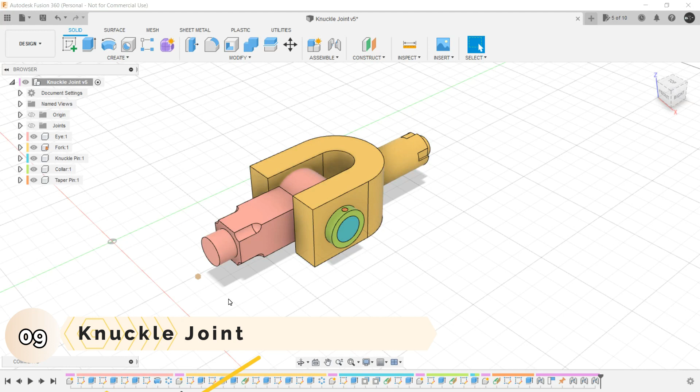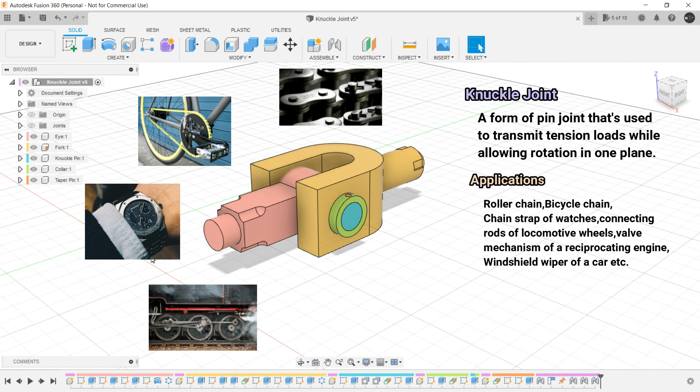So the next assembly that we are going to create is of a knuckle joint. A knuckle joint is a form of pin joint that's used to transmit tension loads while allowing rotation in one plane. There are many applications of this particular joint like link of roller chain, bicycle chain, chain straps of watches, connecting rods between locomotive wheels, valve mechanism of a reciprocating engine, windshield wipers of a car, and the list goes on and on.

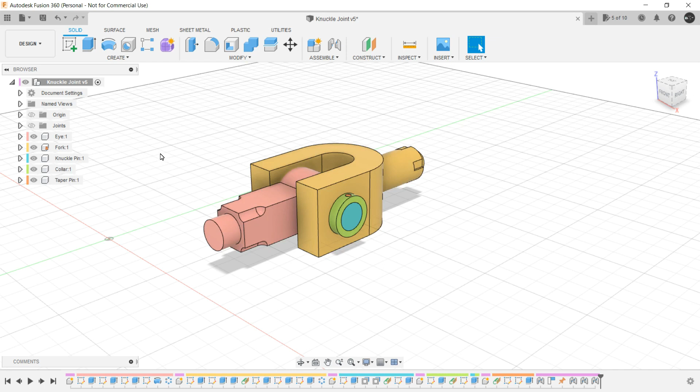In this assembly, we are having four major components: the eye end, fork end, knuckle pin, and collar, and one minor component, that is taper pin. So here also we will follow the same procedure of concentrating on one component at a time. So first we are going to make this eye component. So let's hide all the other ones.

Now in this eye component, we are having one particular profile perpendicular to another. So let's create this one by creating a new design. Go to assemble toolbar and create a new component. Let's name it eye end.

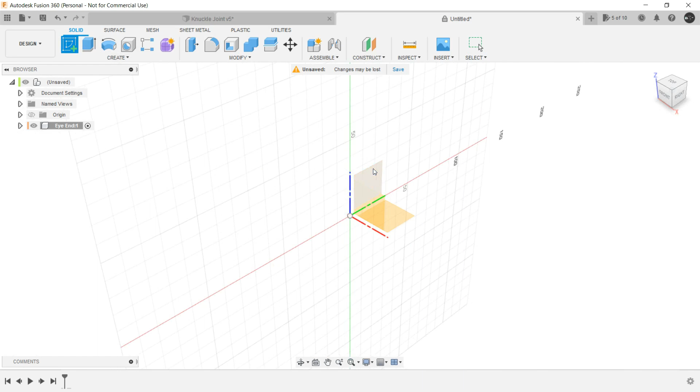Now create a sketch in any of the vertical planes. And let's create a circle by invoking the circle command. The shortcut for the same is C in the keyboard. Let it be of any dimension. And let's press pull it outwards.

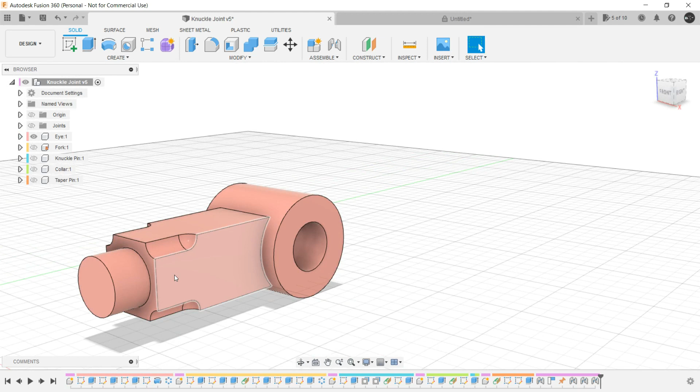Now here, as you can see, this particular profile is like perpendicular to this particular profile, and it is joined by a rectangular extrusion. So what we will do, we will create a sketch, a fresh sketch in this particular plane which is perpendicular to this particular sketch, or basically this particular profile.

Let's create a concentric circle. Let's trace the origin and let's place it somewhere here.

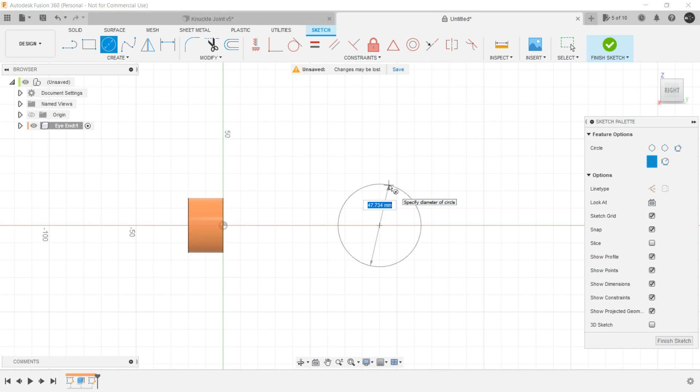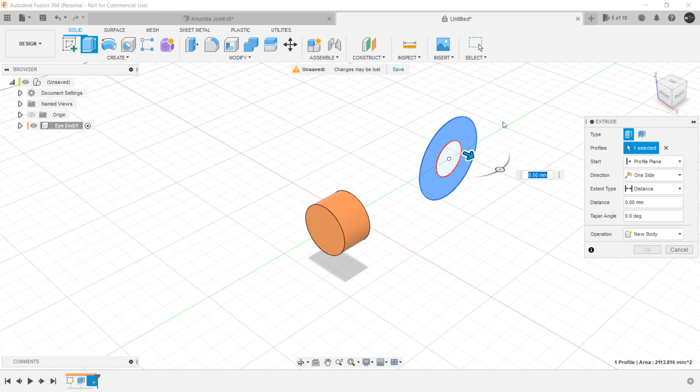Now for the inner circle, you have to remember the dimension. Let it be like 25 mm, and finish the sketch. Now select the profile that is generated. Press pull, direction should be symmetric, and let's extrude it outwards. I think this much is sufficient, and click on OK.

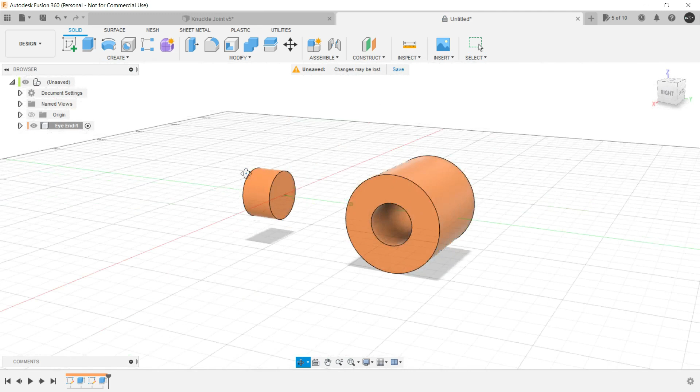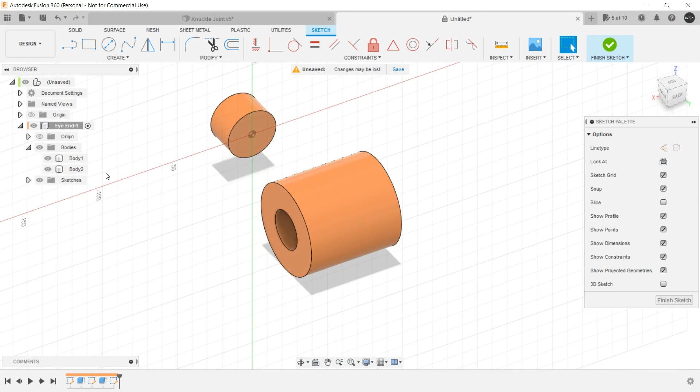Now we are having this rectangular extrusion from this particular profile to this particular profile. So what we will do, we will select this and create a sketch over this one. But as you can see, this second body is hindering our sketch. So what we will do, we'll go to the eye end component and we will hide the second body. This is the first body, this is the second body. So we are going to hide this one.

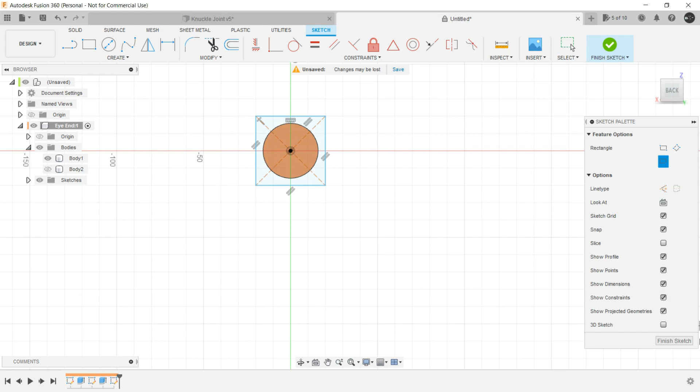Now we can create a sketch over this. So let's create a rectangle, a center rectangle to be precise. Let's create a square like structure. Finish the sketch and show second body as well. Now select this region, right click, press pull, make the extend type as to object and select this surface and click on OK.

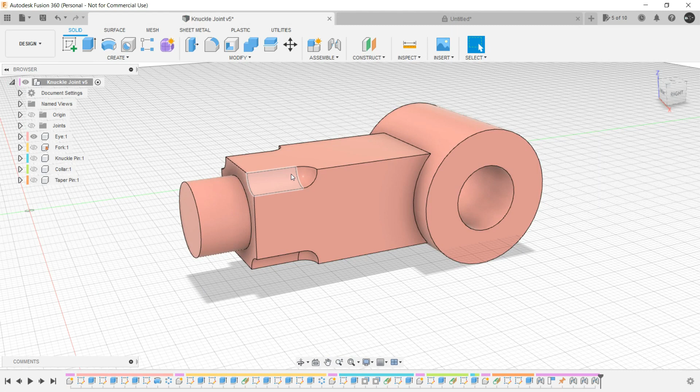Now the outline of eye end is completed. Just one detail is required, that is this particular section of the model. So for this, we will select this particular face, invoke the line command by pressing L in the keyboard, select this end, select any point over here.

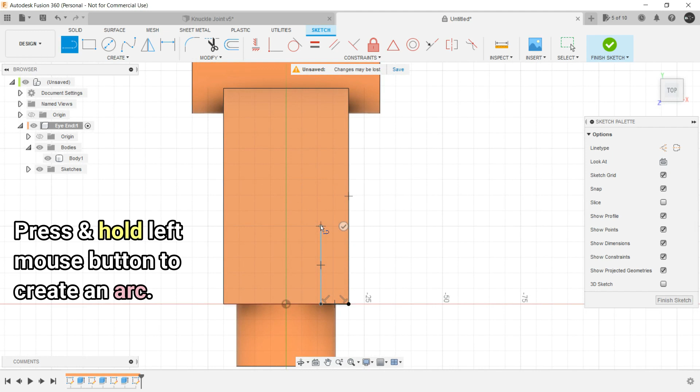Select any point, a vertical one, and then press and hold left mouse button so that we can create an arc, and just close the region.

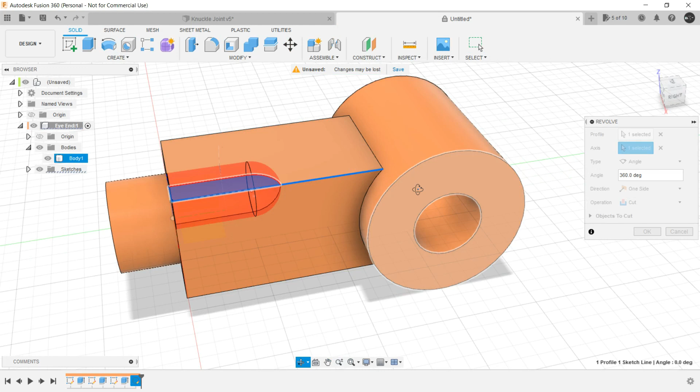Now finish the sketch, select this region and invoke the revolve command. For the axis, select this, and click on OK.

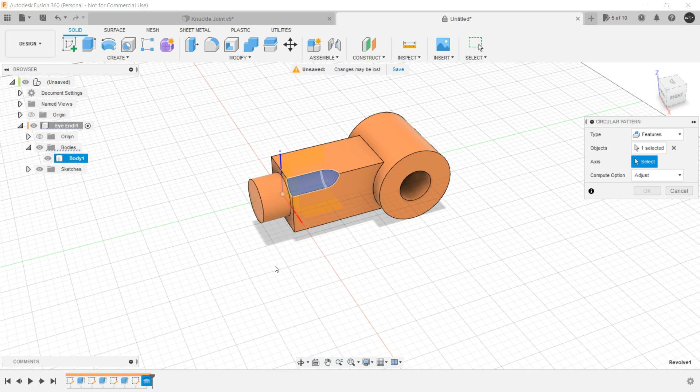So this particular profile has been generated, but this is required in all the 4 corners of the rectangular extrusion. So what we will do, we will create a circular pattern and then select the feature. Here we are having types as faces, bodies, features and components. So here we will be selecting feature because this is a feature that we have generated here. And then for the axis, we have to select the green axis over here, which is not visible as of now. So what we will do, we will zoom out and it will be visible.

It's good to go. Click on OK. So our first component, the eye end, has been created.

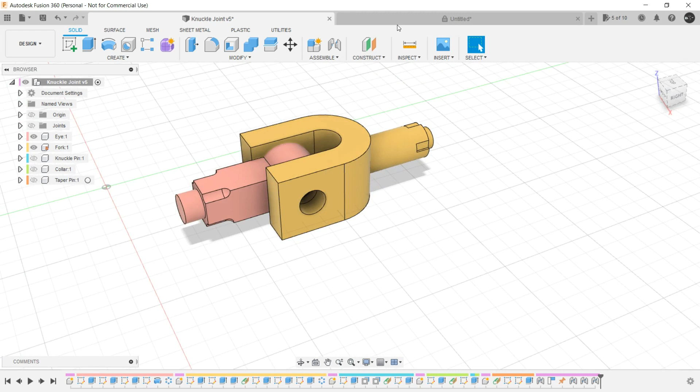Now let's move on to the second component, the fork end. This fork end is dependent on the eye end itself, so we will be using this as the reference. But to create any component, you have to activate the head assembly and then go to the Assemble toolbar and New Component.

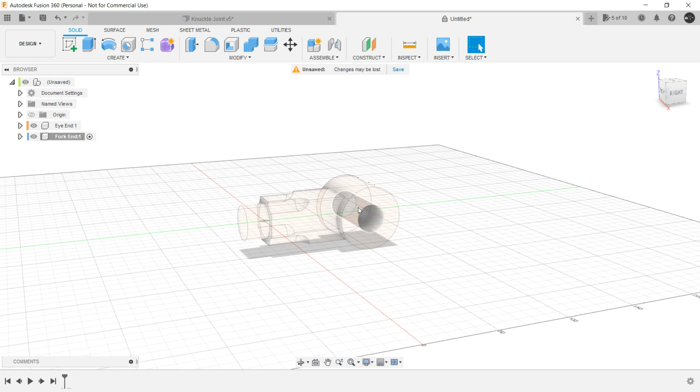This time write as fork end and click on OK. Now select this particular surface and create a center rectangle. Let it be of any dimension, but make sure it is larger than the outer circle diameter.

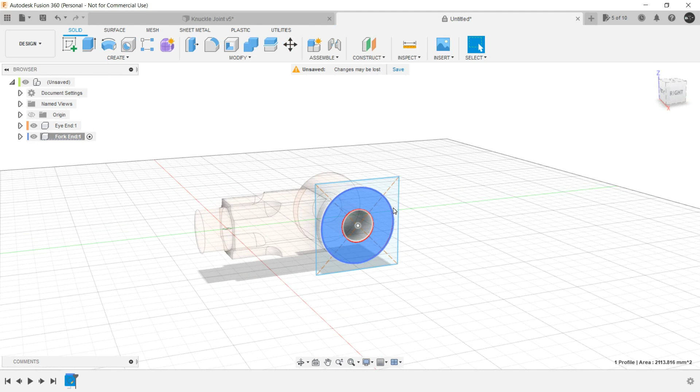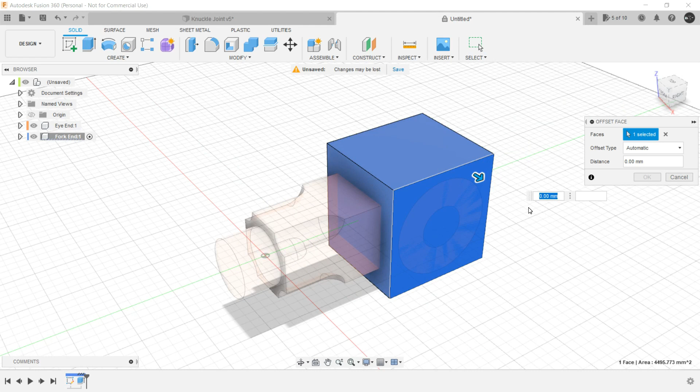Let's finish the sketch. Select this profile, and let's select this one also. Right click, press Pull. Make the extend type as 'to object' and select this surface. Click on OK, then select this and extend it by 10 mm here, and let's extend this one also by 10 mm.

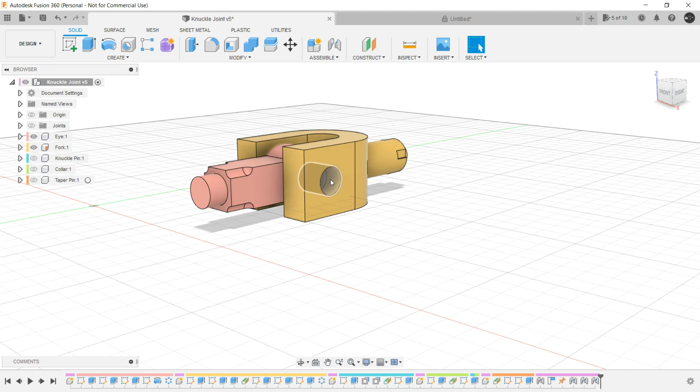Now what we require is this fork looking structure. We have created up to this much only, except for the hole that we will be creating next.

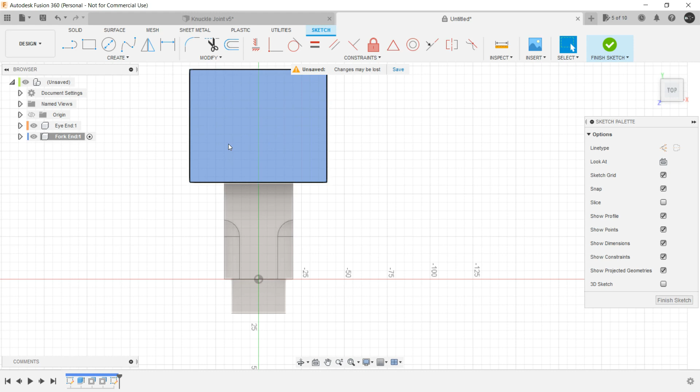So for this, we will simply select this particular face and start creating a sketch. Now we don't know where this eye component is inside this particular extrusion, so we will go to Project and select this particular body completely. Click on OK, and the body has been projected to the sketch itself. So now we have a clear idea from where to make the cut.

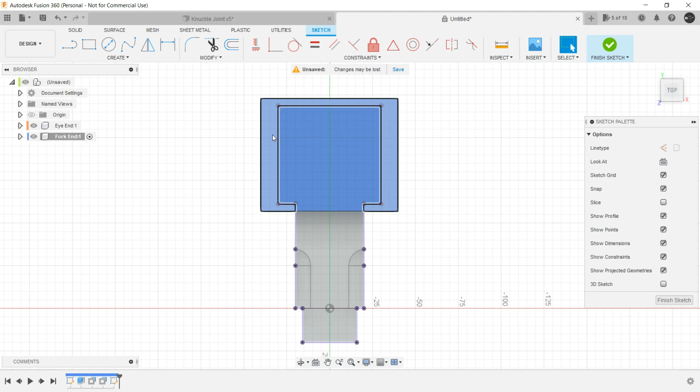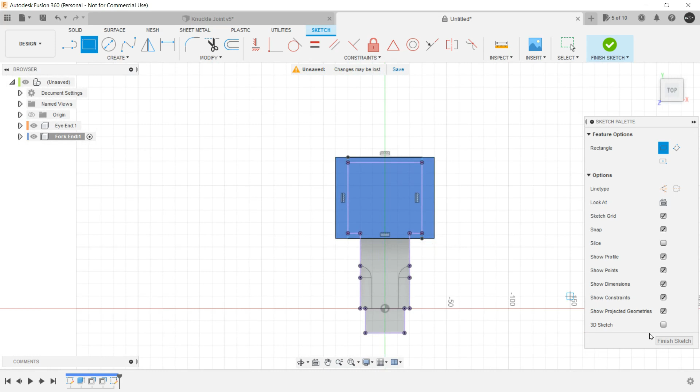Now invoke the rectangle command again, this time 2-point rectangle, and select this point by tracing from the projected sketch. Finish the sketch. Select all these profiles by pressing Ctrl, right click, press Pull, all the way down. But as you can see, this is also cutting our previous eye end component, which is not desirable.

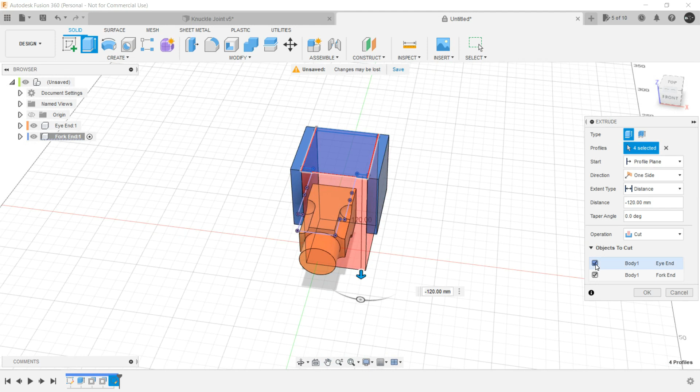So what we will do is, in this extrude palette, we have 'objects to cut'. Here, deselect the eye end and click on OK.

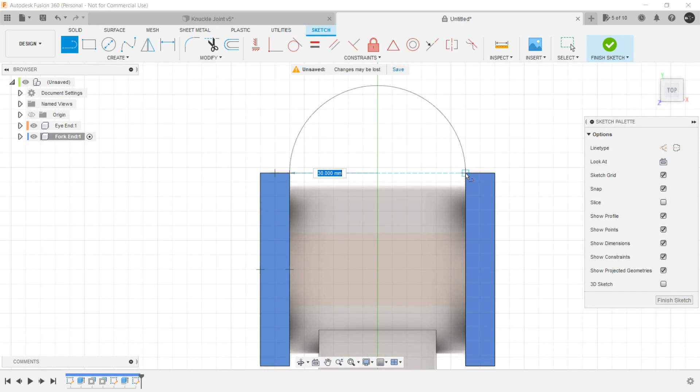Now again select this face, invoke the line command, select this particular end, hold the left mouse button and select the other end. Similarly, from here, hold the left mouse button and select this end. Notice the region is not closed, so we have to close the region as well. Then finish the sketch.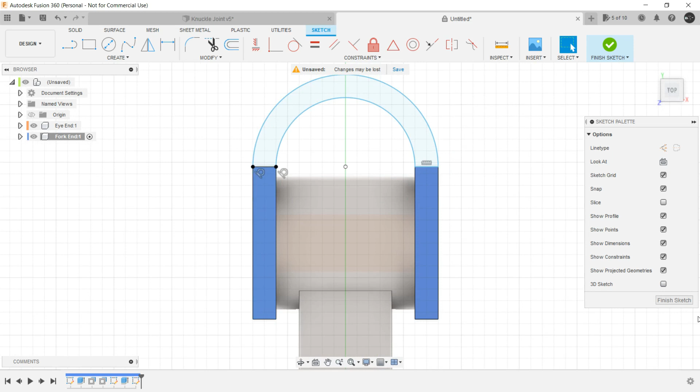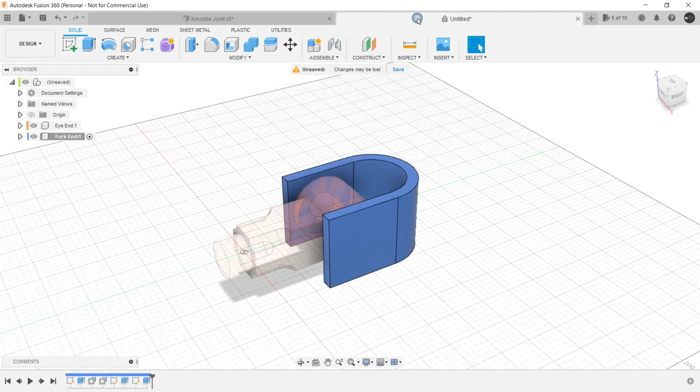Now select this profile, press Pull. Again extent type to object and select this particular face. So the fork end is almost created, except for a hole over here and this particular profile. Now we will create a hole in this particular face.

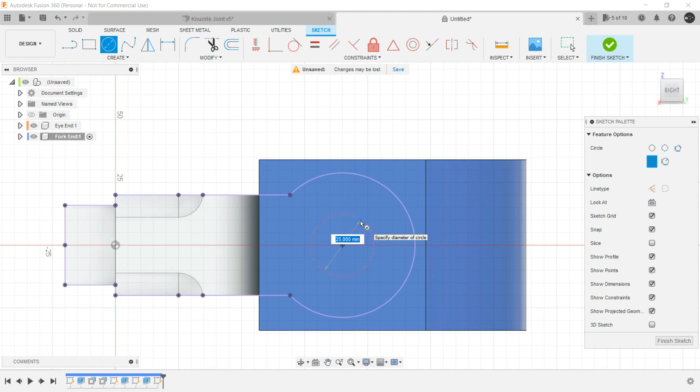Again project this body, click on OK. Invoke the circle command and create a circle of 25 mm. Select this, press Pull, and let's create a hole.

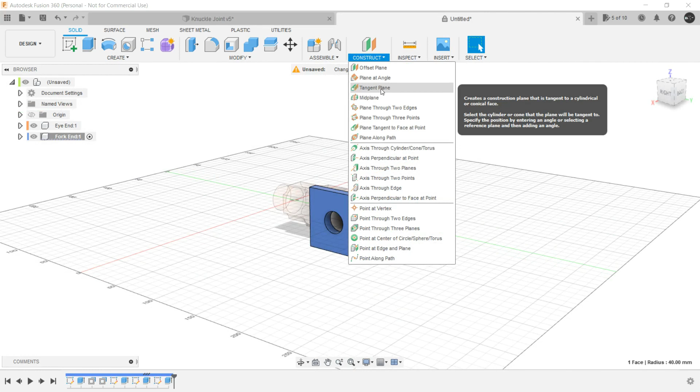Now for this particular profile, we need to create a plane over here. Let's create a tangent plane and start sketching on this one.

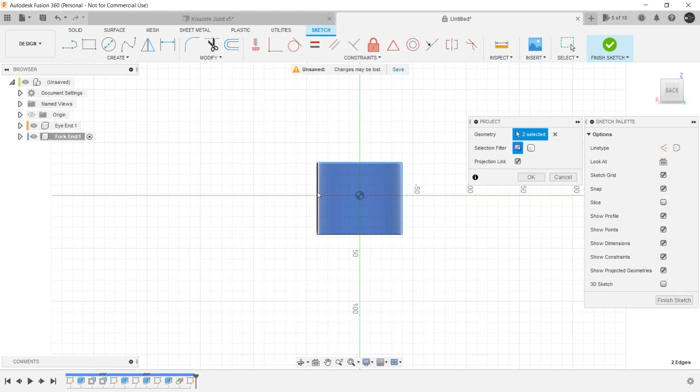Now here we need to find the center point of this particular profile. So for this, we will again use the Project Include command, and this time in the selection filter, select 'specified entity' and select these 2 edges.

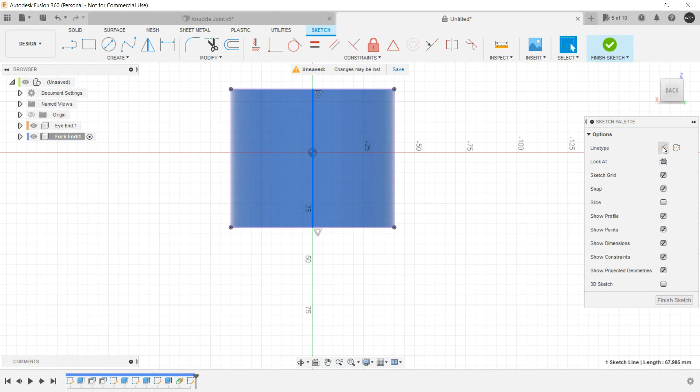Now invoke the line command, find out the center of this one and the center of this one. The midpoint is denoted by this triangular icon. Now let's create this as a construction line, because this is not a part of this particular assembly, and then create a circle at the midpoint of this construction line. Let it be again of any dimension.

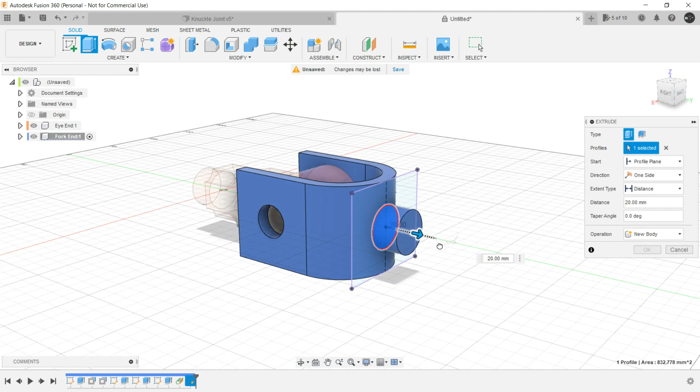Finish the sketch. Select this circular profile, press Pull outwards, and select this face. Create one more circle, a bit smaller one. Finish the sketch. Select this one, press Pull outwards.

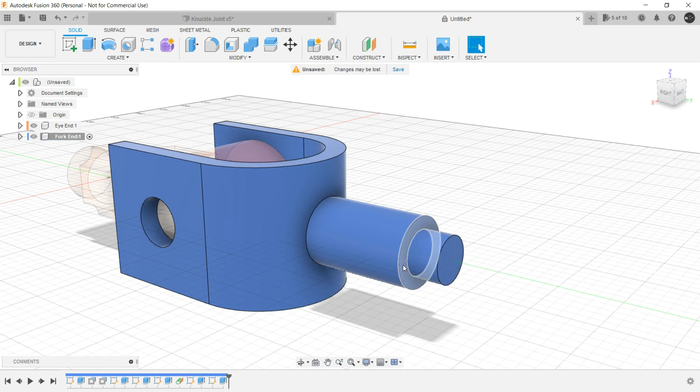Now in this particular face, let's create a rectangle. Let's trace the origin. Select the whole region of the rectangle that has been created and press Pull it like this.

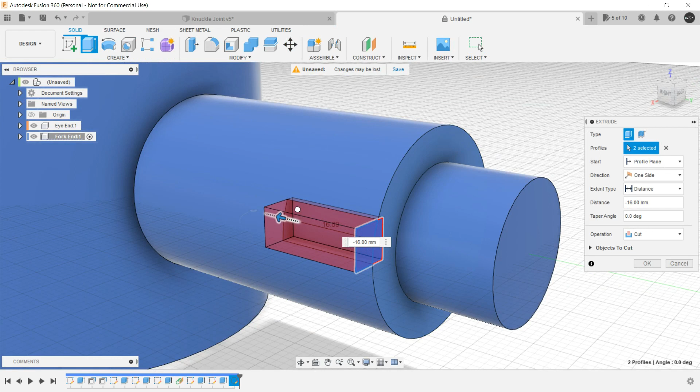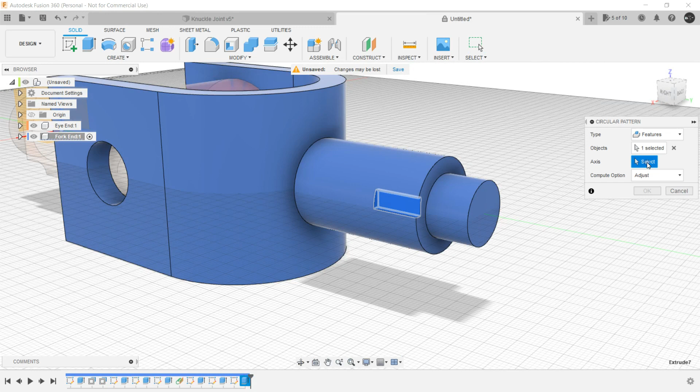Now we need like 4 of these insertions. So what we will do is invoke the circular pattern. Select the feature, this one, and select the axis. Now again the axis would be this green one, and the number of objects would be obviously 4, and click on OK.

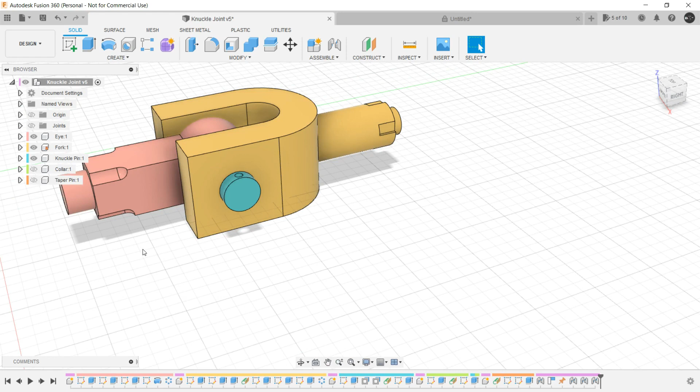So our fork end is also created. Next we need a pin in between, a knuckle pin. So for this we will again activate the head assembly, go to the Assemble toolbar, New Component, and let's name it knuckle pin.

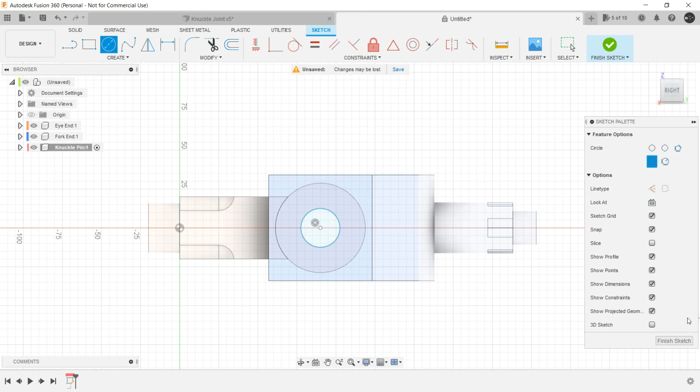Select this face, invoke the circle command, and create a 25 mm circle. Select this, press Pull, extend type as 'to object', and select this. Click on OK.

Select this face, press Pull, let it be like 10 mm outwards, and do the same thing on the other side.

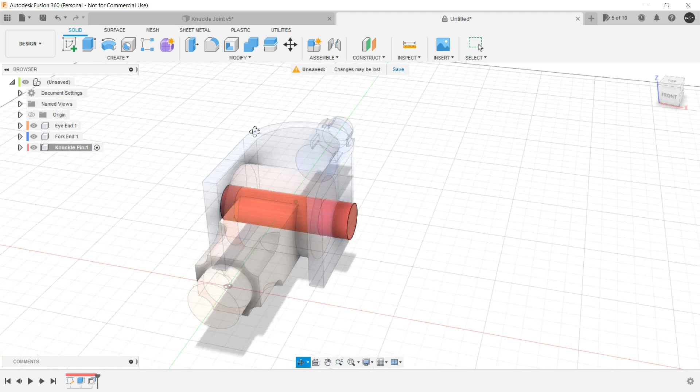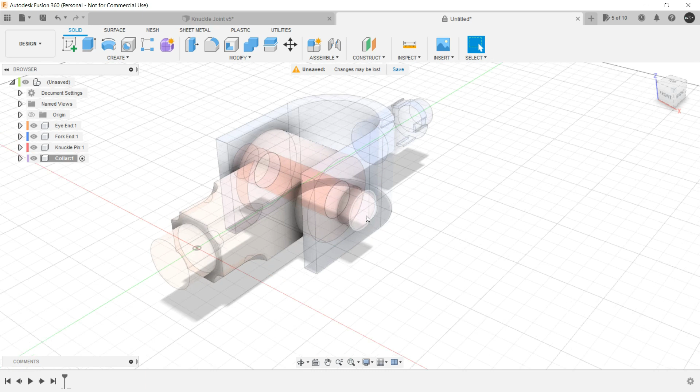Next we will create a collar, the next component. Select the extruded pin and invoke the circle command. Select this region, press pull it, set to object only, select this, and click OK. The operation would be new body.

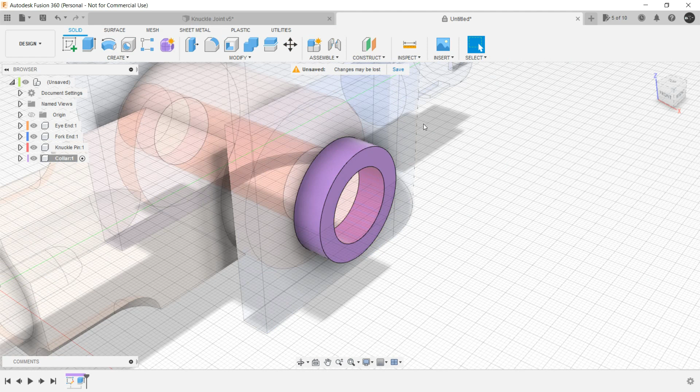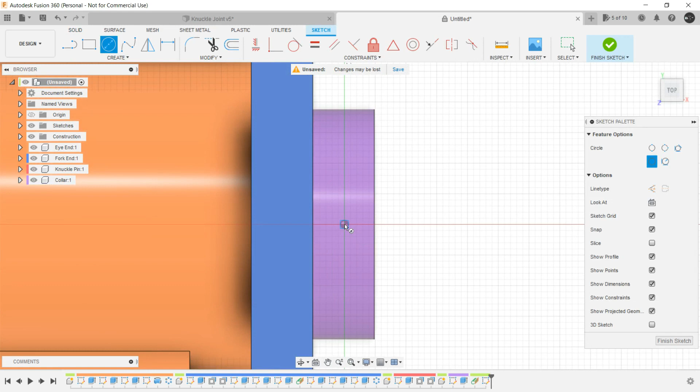Now activate the head assembly, select the collar component, and construct a tangent plane. On this plane, let's create a circle of 4 mm. Finish the sketch, select the profile, press pull it, and create a hole through both components, the pin and the collar, as you can see.

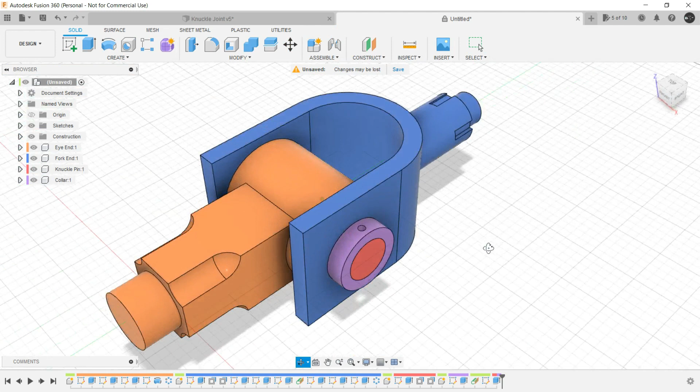Now the last thing required is a pin, a taper pin. We know this hole is 4 mm in diameter. Now we have to see the diameter of the collar. It's like 37.577 millimeters. You can always check anything from the inspect toolbar, the measure tool, with shortcut I on the keyboard.

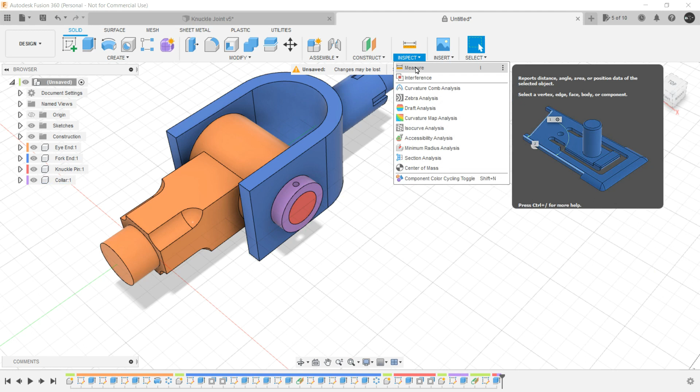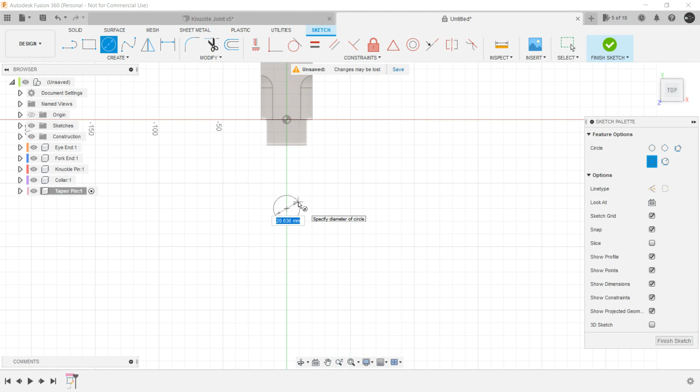Now create a new component and let's name it taper pin. Create a sketch on this plane, let's say, and invoke the circle command. Yeah, it was 4 mm. Finish the sketch and select this one.

Press pull it like 37 somewhat, but provide it a bit of taper. Let it be like minus 3 degrees - it would be very less. Let it be 2, or let it be 1 only.

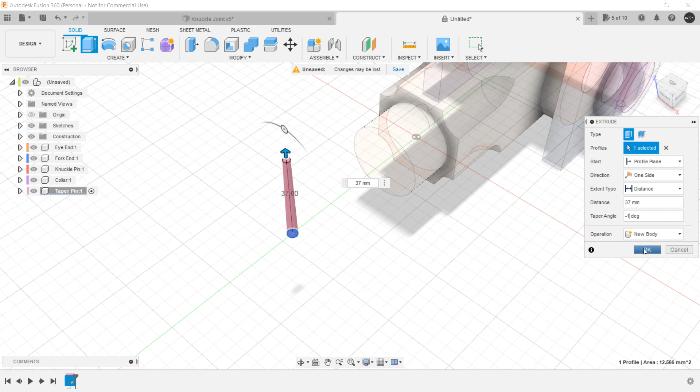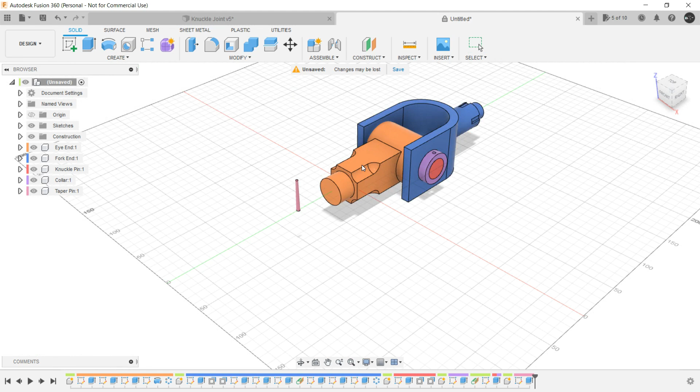So now all the components of the knuckle joint have been created. We have the eye end, the fork, the knuckle pin, collar, and a taper pin. You can always revert to the original position by clicking here, but as of now, let's move them out here and there.

Now in assembly, as I told earlier, we need to ground at least one component in order to have relative motion or relative movement between other components. So we are going to ground the fork end and click on capture position.

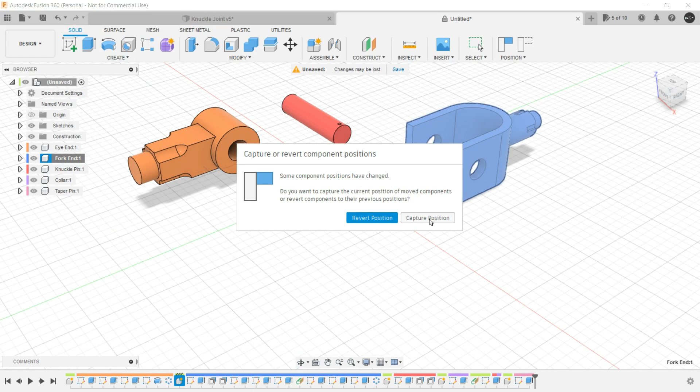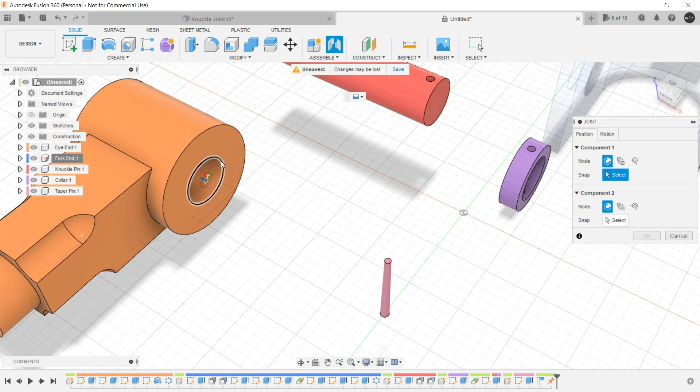Now the first joint we are going to create is between the eye end and the fork end. Just click here or go to assemble and click here, or use the shortcut key J on the keyboard. Select this particular end and select this particular end. The motion would obviously be a revolute one, and click OK.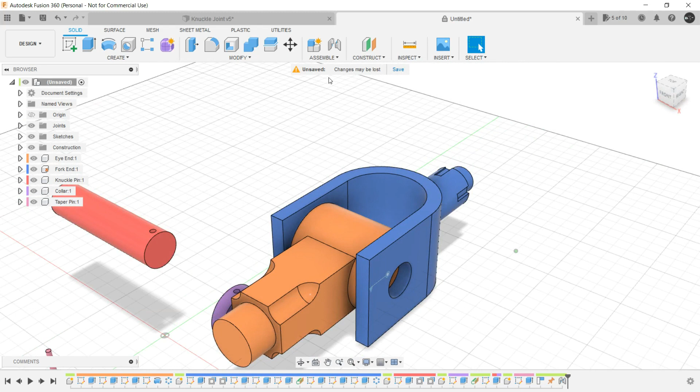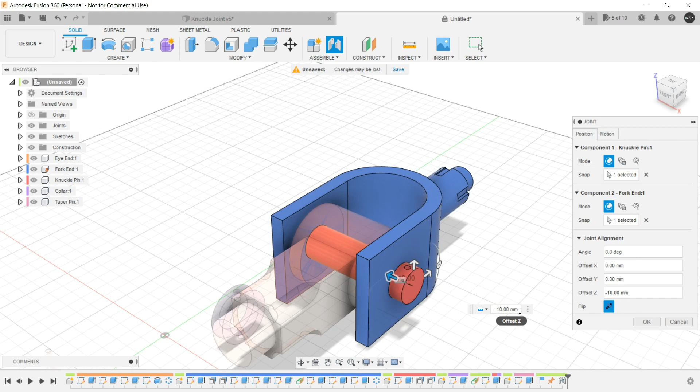Next we have a pin that has to be inserted between the hole over here. For this, click on joint, select this end, and the motion would be rigid. But here we have to get this particular pin outwards, like 10 mm outwards, because this much that we have extruded earlier.

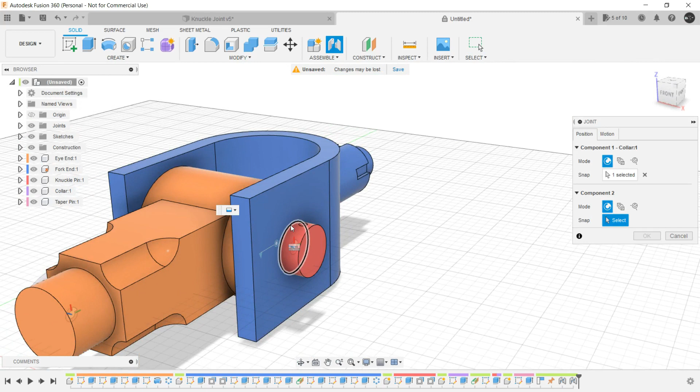Now next we have to provide the collar. Go to joint, select this face and select this face, and click OK.

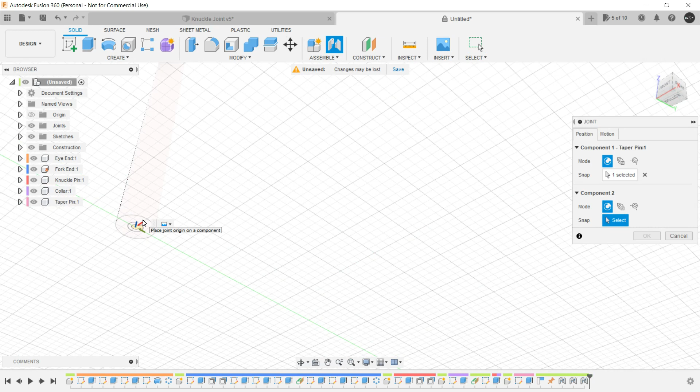And lastly, we have to attach this taper pin. So for this, again go to joint, select this end and select this end. As you can see, it is protruding outwards, which is not desirable. So what we can do is flip this component over the joint origin, and click OK.

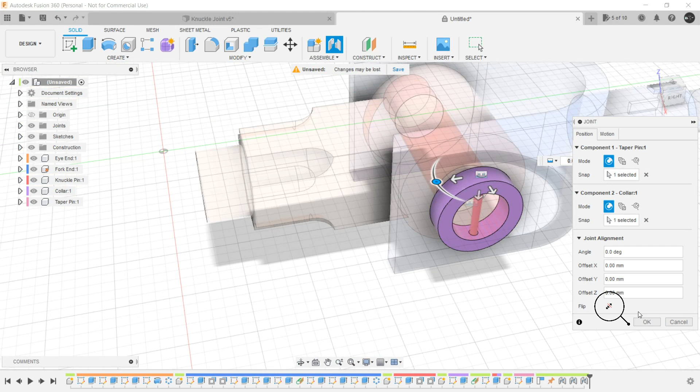Now our knuckle joint is complete. But as you can see, when we rotate this joint, it rotates like 360 degrees and it is overlapping with the fork end component, which is not desirable.

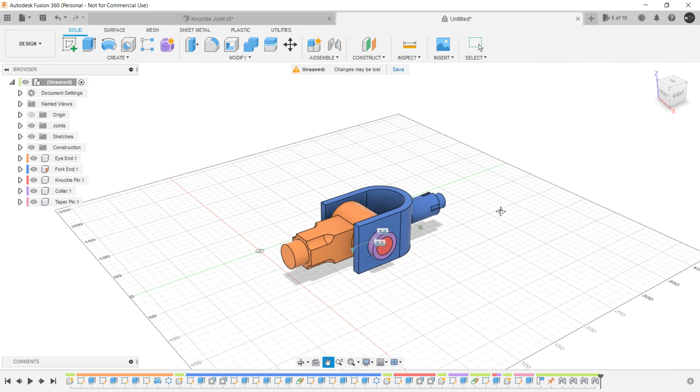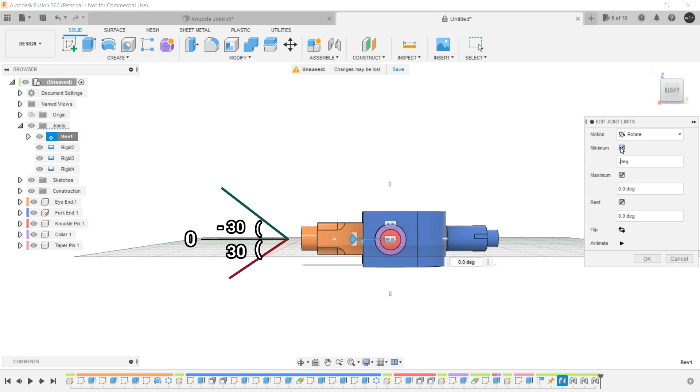So what we will do is go to joints, select the revolute we have provided, right click and edit joint limits. In this case, let's make 0 degree the rest, and for minimum we'll provide minus 30 degrees, and for maximum let's provide 30 degrees. Just animate it and see - yeah, it looks good. Click OK. And finally, our knuckle joint is officially completed.